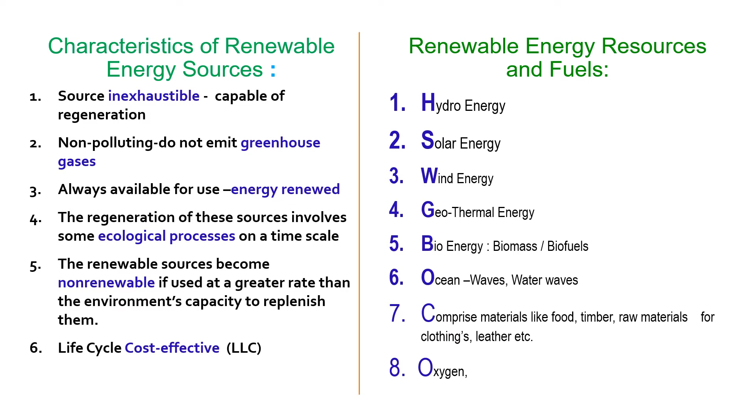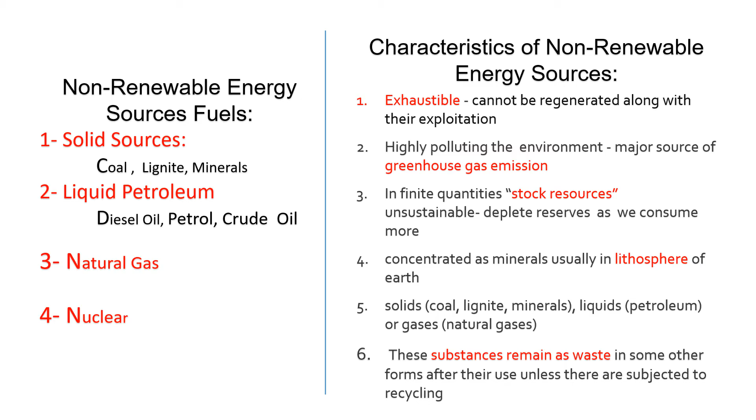Just to refresh our memories about the inexhaustible, environmental friendly, low life cycle impact energy resources and fuels like hydro, solar, wind, geothermal, bio, ocean, oxygen, etc. Non-renewable fuels, which are exhaustible and highly polluting, have a high carbon footprint, and are normally found in the lithosphere of the Earth.

The total energy mix of Pakistan is about 34,000 megawatts. Out of this, 35% energy comes from renewable resources, 65% from fossil fuel. 48% of the resource energy is produced by local resources, and 52% we import fossil fuel from outside for producing this energy mix.

Two factors determine the affordability of energy. For a common man, it should be low cost, he should be able to buy it always, and it should be accessible to him. For an investor, of course, it is the upfront cost and also the return on investment.

In this graph, a comparison has been given for both fossil fuel based energy production and renewable energy sources. For example, gas turbine combined cycle would be the cheapest if we produce energy using natural gas, combined cycle, dual cycle. Also, if we look at the renewable sources, the photovoltaic tracking system would be the cheapest source for renewable energy.

Again, the second best source is the gas turbine using natural gas. And if you compare wind, for example, wind will cost you about 11 rupees to 30 rupees per unit, and similarly photovoltaic will cost you 10 to 40 rupees per unit.

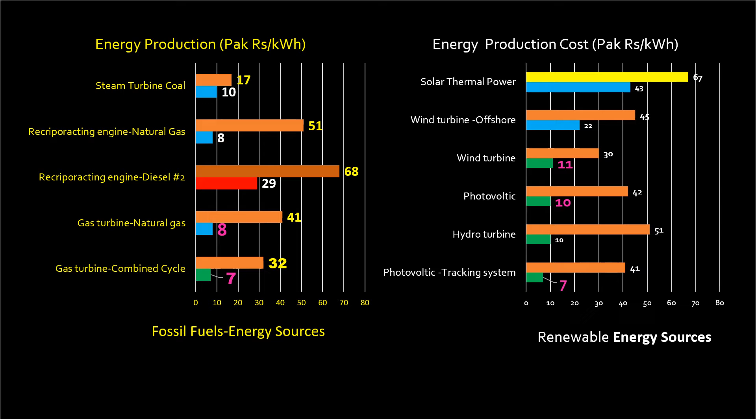I have used the energy model RETScreen Expert, using NASA weather data, for calculating the installed cost and production cost of both fossil fuels and renewable energies. If you look at the installed cost in dollars per kilowatt, diesel engines are the cheapest because it will cost you $350 per kilowatt. When you produce 1 kilowatt of power, you have to spend $350. Similarly, natural gas engines with CHP will cost you about $575 to produce 1 kilowatt.

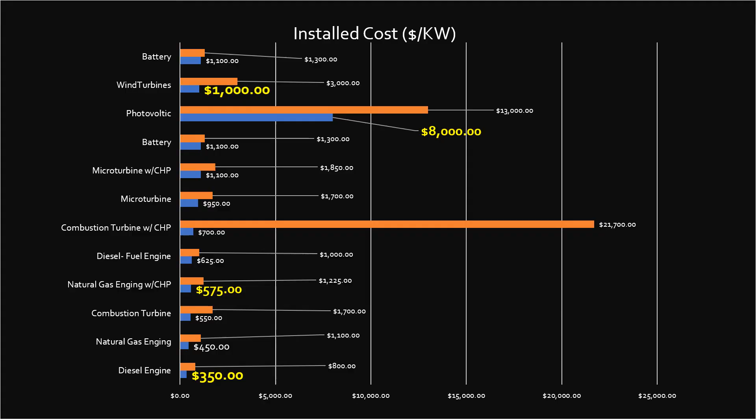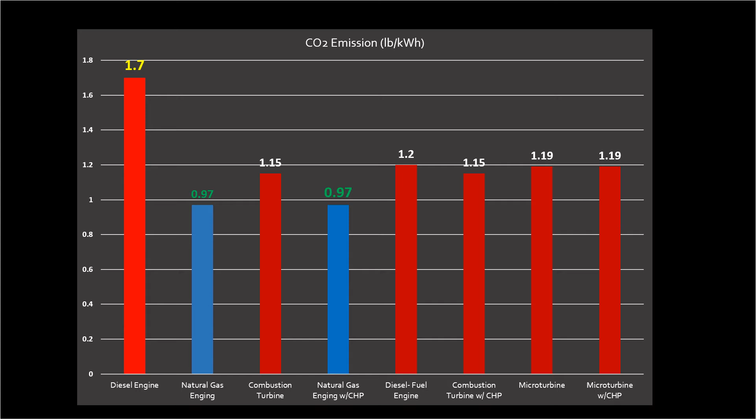Green energies do not have any carbon footprint, but fossil fuels have varying carbon and greenhouse gas emission capabilities. For example, take diesel engines: diesel produces 1.7 pounds per kilowatt hour per unit, and similarly combustion turbines, diesel fuel engines, and micro turbines are the high emitting fossil fuels, high emitting energy sources. Comparatively, natural gas is a bit lower in CO2 emitted compared to the carbon from diesel engines and other turbines.

Two common renewable energy resources, photovoltaic and wind harvesting, are under discussion in Pakistan, and people are working on those projects. As we know, photovoltaic harvesting depends on the radiation of the sun and the covered area where we install the photovoltaic cells, photovoltaic panels. It is measured in kilowatt hour per meter square per day, and similarly wind harvesting depends on the speed of the wind, measured in meters per second.

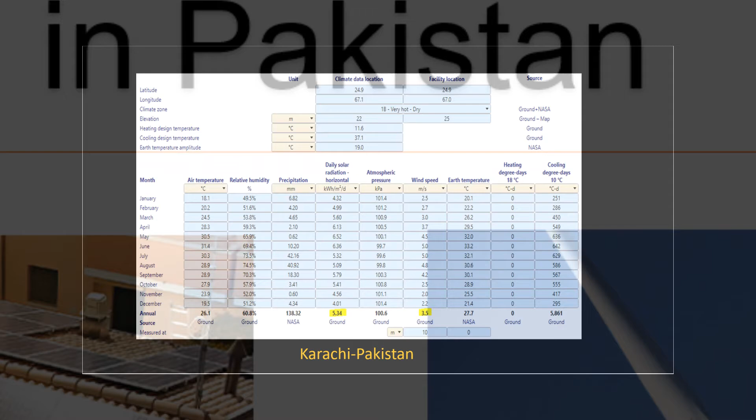Using the NASA weather network, I used the energy model RETScreen Expert tool to determine the potential of solar and wind harvesting. For example, in Karachi, the annual solar radiation is 5.34 kilowatt hours per meter square per day. This means if you install a 1 square meter photovoltaic panel, you can produce about 5.34 units from that. Similarly, the average wind speed in Karachi is 3.5.

The photovoltaic harvesting in kilowatt hours per meter square per day for Lahore is 4.68, for Islamabad is 5.33, Peshawar is 5.16, Hunza GB is 4.45, and Quetta is 5.54.

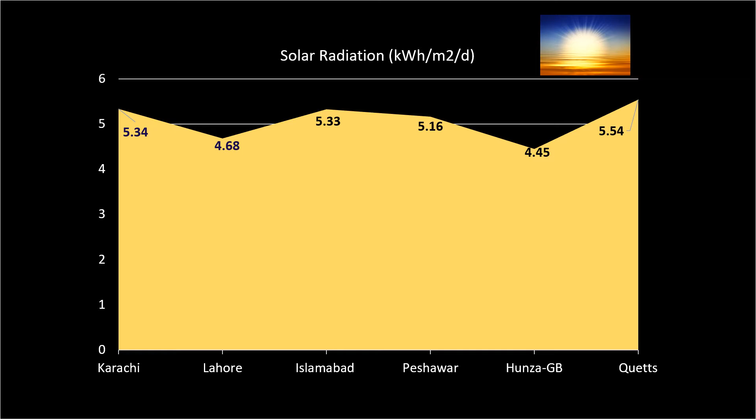Similarly, if we look at the available wind in different cities of Pakistan, I compared Karachi, Lahore, Islamabad, Peshawar, Quetta, and Hunza. Karachi leads with an average of 5 and sometimes above, followed by Quetta, then Peshawar, then Islamabad, and last is Hunza. So there is very little potential for wind harvesting in Hunza because of the low average wind speed.

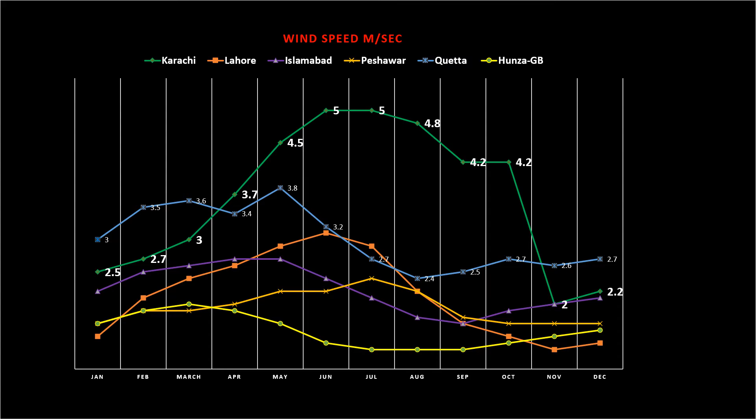Let me ask you a question: what is the immediate and short-term energy need of Pakistan? Is it clean energy, or is it affordable energy? My answer would be it should be an affordable, accessible, sustainable energy source for the common man.

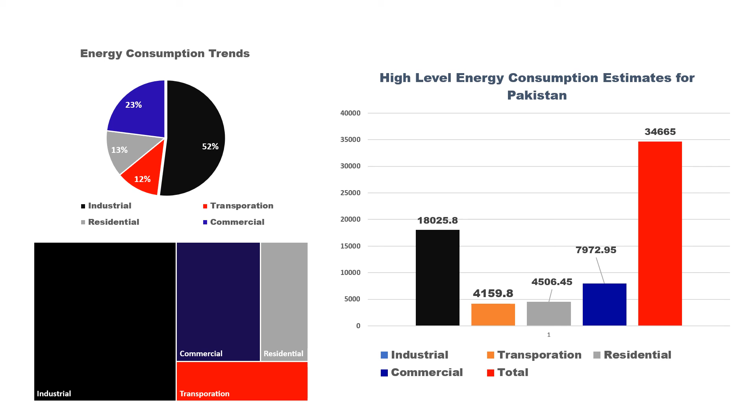The international trend, or rather the developed countries' trend, for using total energy across sectors is 52% industrial, 12% transportation, 13% residential, and 23% commercial. Using the same formula, I calculated the energy consumed by different sectors in Pakistan.

If we want to be as competitive as our rival India, we have to increase our industrial efficiencies, commercial efficiencies, and overall economic efficiency by at least 40 to 50%.

I have set a target of 40% for industrial, 30% for transportation, 30% for residential, and 45% for commercial. So if we increase the efficiencies of our economy by an average of 40%, we will probably be able to spare about 14,000 megawatts of energy for the poor and common people in Pakistan, which is equivalent to constructing a dam like Mangla to produce that kind of energy.

Unfortunately, because of YouTube time constraints, I am unable to complete my presentation, so I have to make 2 more presentations on this topic, which is very crucial and important to all of us, especially for every Pakistani common man.